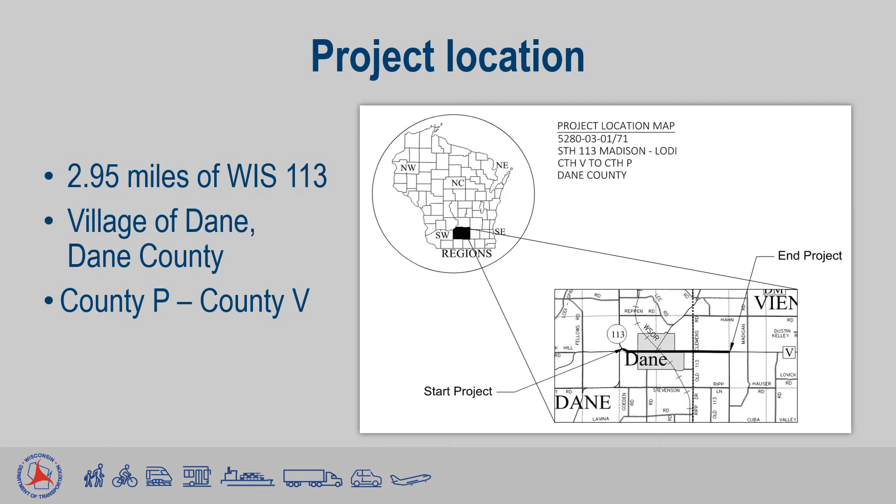This project will take place on just under 3 miles of Wisconsin Highway 113, primarily in the town and village of Dane in Dane County. A small portion of this project will be in the town of Vienna to the east. The project limits will be between the intersections of County Highway P in the west and County Highway V in the east.

Here is a closer look at the project limits highlighted in red. In the west, our project will match into the new County Highway P roundabout, being constructed in 2023. To the east, our project will end at the County Highway V intersection and match into the new pavement of Highway 113 coming north from Waunakee, planned for construction in 2023.

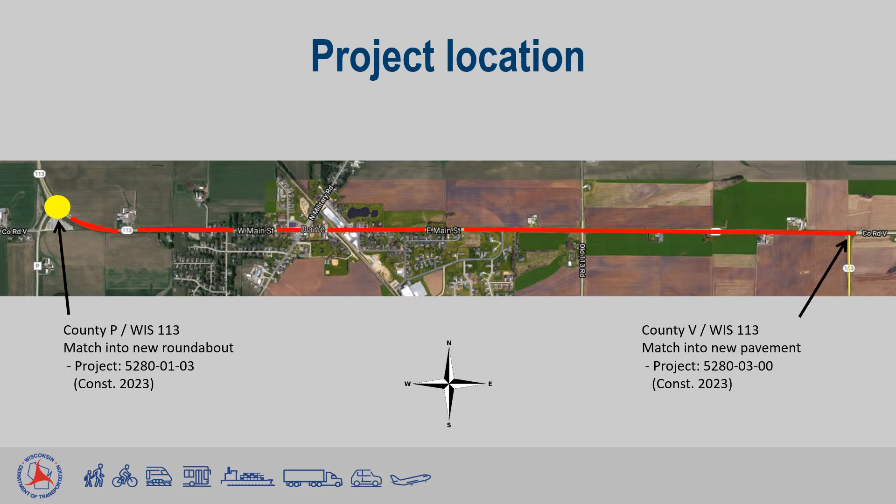The purpose of this project is to improve the safety, comfort, and longevity of the highway. This stretch of 113 is exhibiting extensive pavement cracking, as well as frayed edges, wheel path rutting, and deteriorating joints. These pavement failures are increasing both safety concerns and maintenance costs. If no action is taken, this roadway will eventually be unsafe to use and infeasible to maintain.

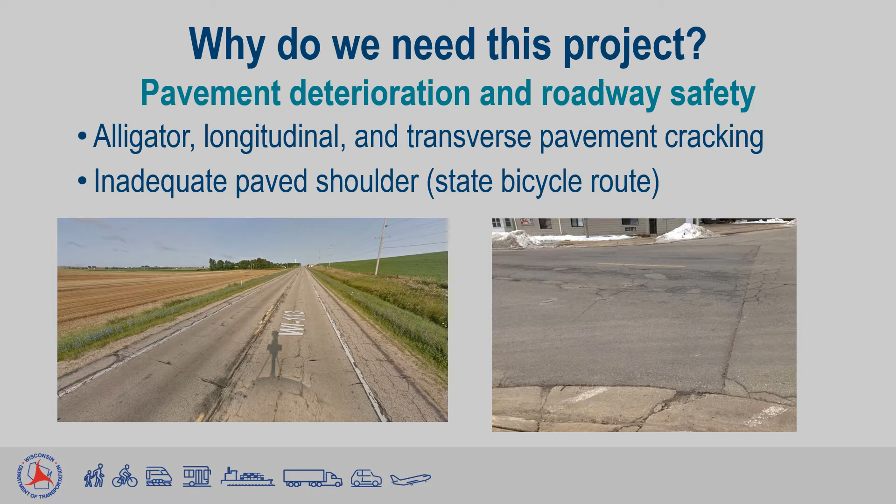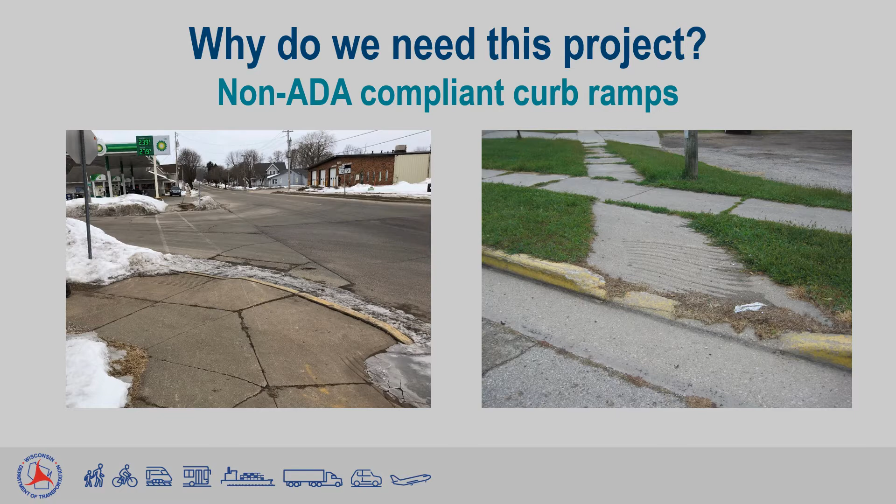Additionally, Highway 113 is intended to serve as a state bicycle route and should therefore have a consistent 5-foot paved shoulder for bicyclists. This project is also intended to update the curb ramps along 113 in the Village of Dane to meet the accessibility standards of the Americans with Disabilities Act. The curb ramps in the Village of Dane do not currently meet ADA standards and therefore must be replaced.

The preliminary design for this project contains several proposed improvements. Foremost is removing and replacing the existing 4.5 inches of pavement with 5 inches of fresh asphalt pavement. Between Clemens Road and County Highway V to the east, 3 inches of milled asphalt will be relaid below the new 5-inch pavement to increase the stability and longevity of the roadway base.

Roadway cross-sections and geometry will be maintained as existing throughout, but some sections of paved shoulder will be widened by 1 to 3 feet in order to establish a consistent 5-foot paved shoulder for bicyclists. This newly laid roadway will have centerline and shoulder rumble strips, fresh pavement markings, and additional shoulder aggregate.

As a part of this project, we will also be removing and replacing a dual culvert pipe underneath the roadway, near the County Highway V intersection. This culvert must be replaced due to age and inadequate drainage capacity of a relatively large catchment basin.

Additionally, the curb ramps along Highway 113 in the Village of Dane will be removed and replaced by ramps that are compliant with the Americans with Disabilities Act. These new ramps will improve the accessibility of Dane's main street for all users.

The Wisconsin Southern Railroad will be installing a new railroad crossing approach and signals at their tracks' intersection with Wisconsin 113 in the Village of Dane. This work will be conducted as a part of our project under the total road closure.

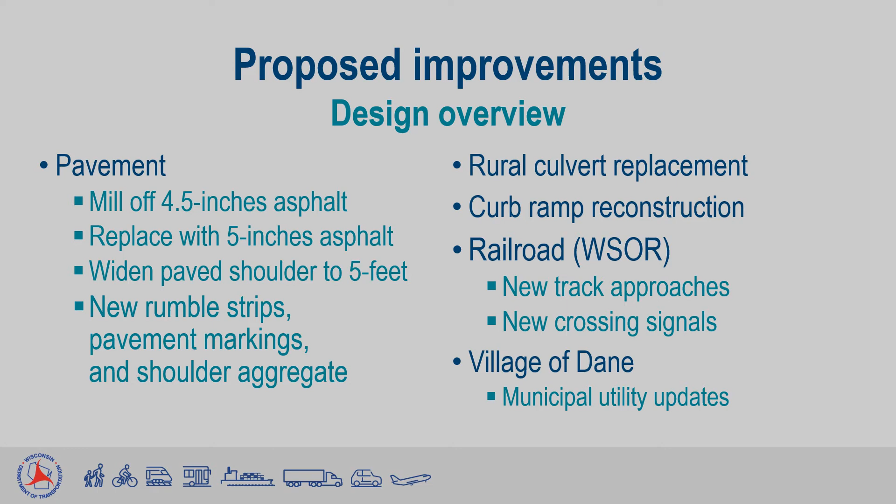Shown here is a cross-section of the proposed roadway through the Village of Dane. Within the village limits, the existing 8-foot parking lanes will be maintained on both sides of the road, and all driveway aprons will be unchanged. A vast majority of sidewalk, curb, and gutter will be untouched in this project, except for small sections that will be replaced around the new curb ramps.

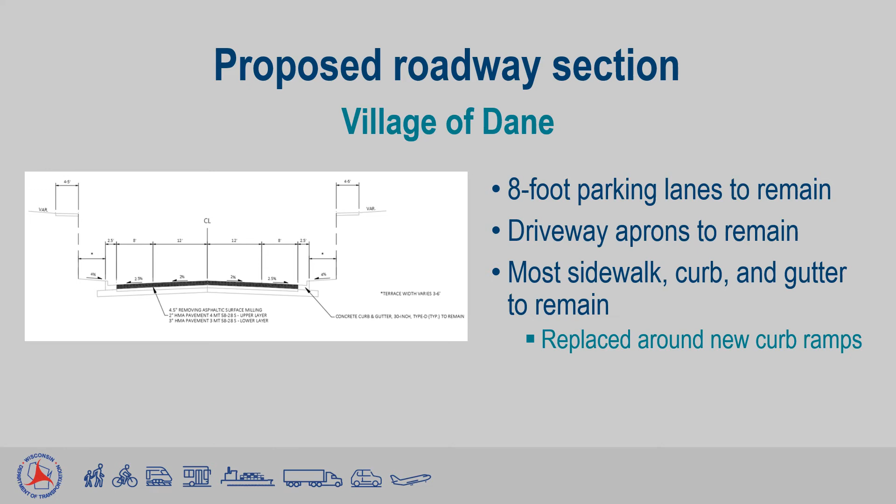The real estate impacts of this project will be minimal. 3 or 4 small permanent right-of-way acquisitions will be necessary in order to construct ADA-compliant curb ramps. These acquisitions are small wedges and corners of much larger parcels, such as the example seen here at the corner of 113 and North Street.

In order to mitigate our construction impacts, temporary limited easements will be acquired at every curb ramp replacement, as well as around the culvert replacement site. The real estate section of WISDOT will develop and establish a plat for these acquisitions within a 2-year timeframe, following the approval of our preliminary design plans.

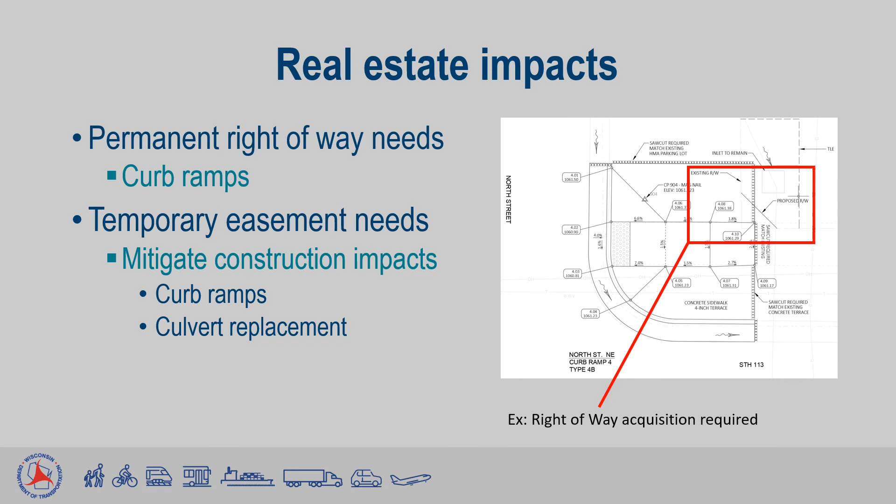The highway will be under a total road closure for the majority of construction operations in this project. The traffic management plan is still under development at this time, but a state highway detour will be established and local access will be maintained. The highway will be open with flagging operations when and where possible, as construction will be staged to limit the time of our total road closure.

Residential, commercial, and agricultural access will be maintained throughout the entire project, and where sidewalks are closed for curb ramp construction, temporary pedestrian accommodations will be established.

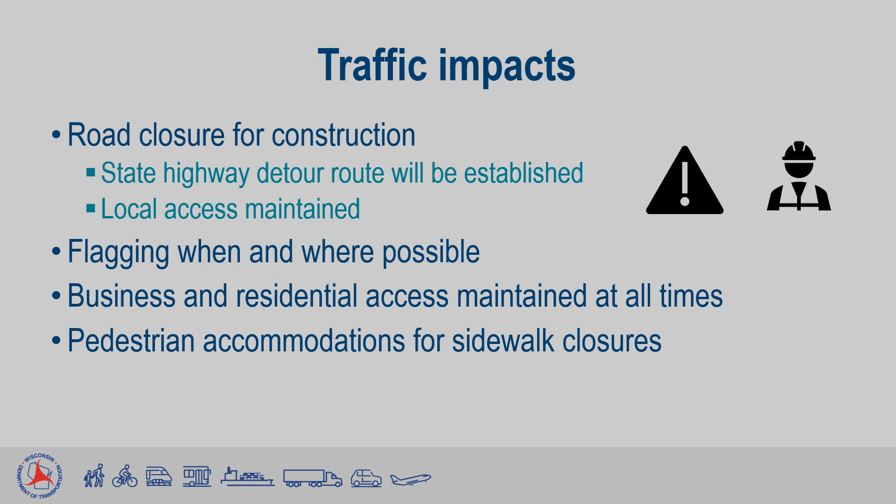This project is currently scheduled to be constructed in 2027, but that date is advanceable to 2025 if funding becomes available. With 2025 construction being a real possibility, the final plans for this project are scheduled to be submitted in August of 2024. Before that, real estate will have 2 years to complete their acquisition process. The preliminary design plans and draft environmental document are therefore scheduled to be completed by the middle of this year.

As the project continues to develop, updated information will be added to the project website, and a second public involvement meeting may be held.